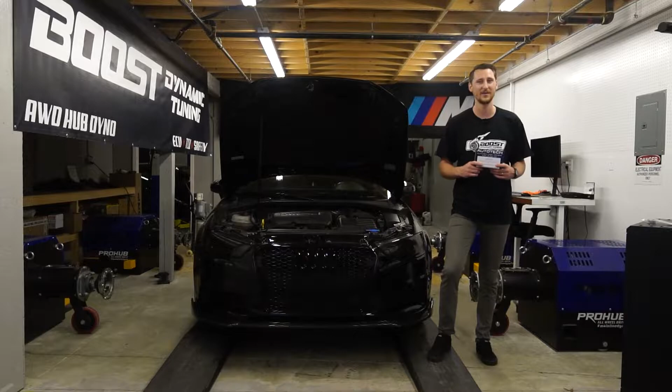As you recall, last week we installed the A3 with full E85 on the dyno and threw down some pretty massive gains, but we're having a little issue with the high pressure fuel pump keeping fuel pressure up. So today we're going to install a high pressure fuel pump so we can keep up with fuel pressure. Let's get into it.

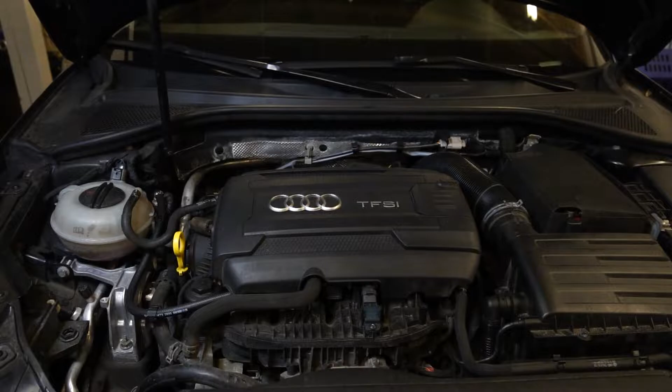As you guys already know, remove this engine cover and set that off to the side. So here's the high pressure fuel pump, this is what we'll be removing today. What I'm gonna do is go ahead and disconnect the fuel line. You guys can disconnect it from up here, but I'm gonna do it down here so I don't have to break the clamp.

We're gonna keep that there just in case some fuel decides to come out. Do not open your driver's side door unless you disconnect your battery, or the fuel pump will kick on and squirt it everywhere.

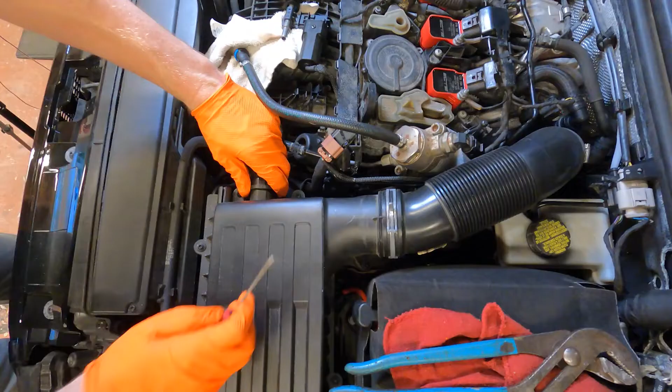Now that that's done, we're gonna go and get to this fuel line down here. We could remove the air box, it's not the world's hardest thing to do. I might just remove the air box to make it a little easier, so let's do that. Grab a little pick, right here, get that out. That's off.

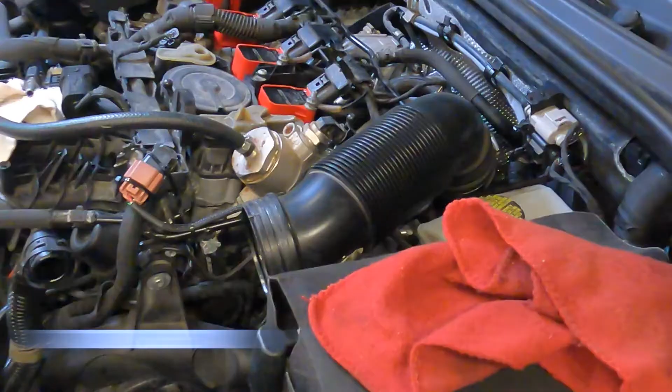So I usually start in this corner, get down below, give her a good yank. Good yank, there we go. So we got a 17mm wrench here, go ahead and turn it righty-tighty, because don't forget we're underneath, so it's the opposite way.

We got this coolant line right here, it's kind of getting in our way. Here, let me get a small wrench. Alrighty, this will help.

If you wish, put this in there. I mean, nothing should squirt out, but if it does, all right, so I'm gonna put the rag right here to catch some fuel. It's a hot engine, it could combust, but I don't really think that's the case.

Next thing you need to do is take off these bolts, take this connector off. You guys know how I like using my pick. There we go, alright, let's take those bolts out. So we're using a ZN14, what they call a triple square.

Now, next thing we're gonna do - it's pretty warm, but I'm just gonna wiggle it. There we go, kind of push this fuel line down just a smidge. Oh, it's trying to squirt out, so I'm gonna put this right here.

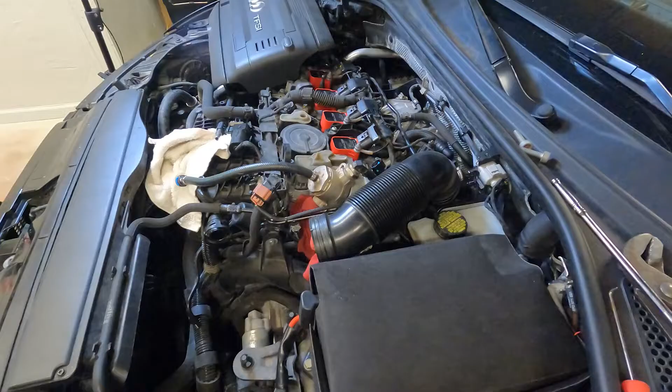Without damaging the mating surface, I'm gonna use this to kind of pry it out. Push that fuel line back. Fuel line's pretty tight up there.

I just want to relieve that fuel pressure, so I'm going to remove this boost hose. I'm not going to remove the hose, but just break this off so I can get some room. It's a little tight and the high pressure fuel pump is hot, this engine was just ran. So back that off, there we go. It's going to give us a little more room to go back there.

Then we have a T25. I'm gonna get a magnet so I don't drop that bolt. There we go, alright, now I can remove the fuel line.

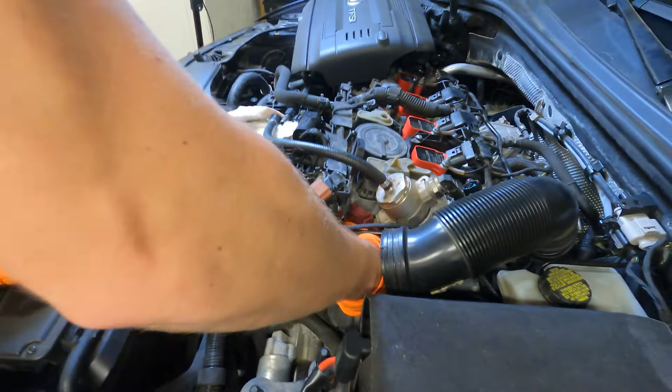Oh, it's still tight even with that moved. There we go. All right, high pressure fuel pump is out, go put it on the bench.

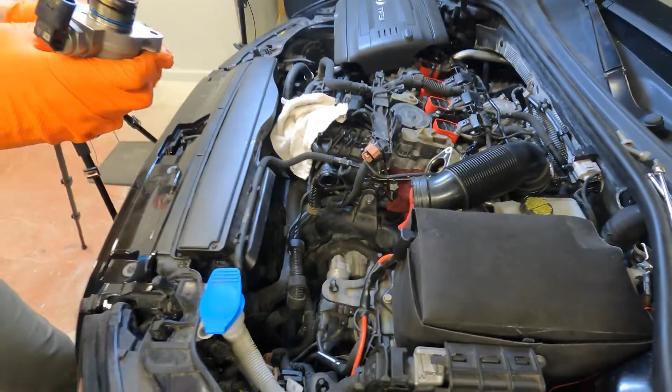So I'm gonna try using this, there's this tool to do this right, I did not get it in time. I'm trying to get this done here, so let's try this. I'm gonna press this down, nothing too crazy, until the spring's pretty much compressed.

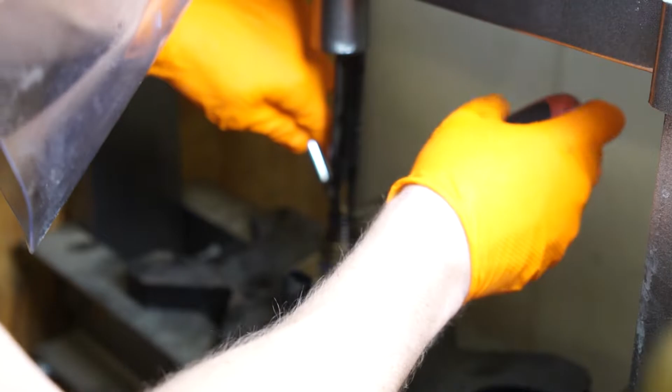Both on there pretty nice, there we go, look at that. That's a clean removal, just saying, for those of you who don't have the tool. This again, you can get this from Harbor Freight, spring compressor tool, or Sears. Honestly, I think I got it from Sears.

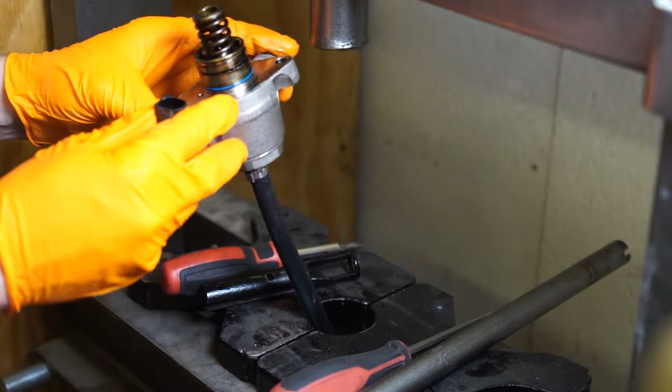So back this off. All right, let's go over to the vise. Alrighty, good to go ahead and remove this, set this off this side. Remember guys, keep a clean work area.

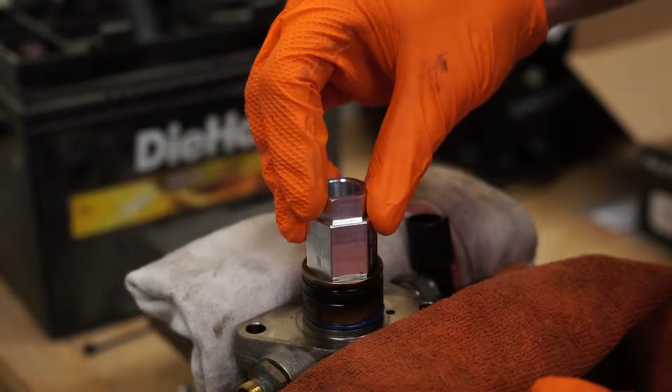All right, so apparently this thing is gonna go here. Wow, that is loose, they're not lying, watched a couple videos, they talked about that. And we got a good old 27, so let's see what we can do here. A little excessive on the breaker bar, but I wanna see what it's all about.

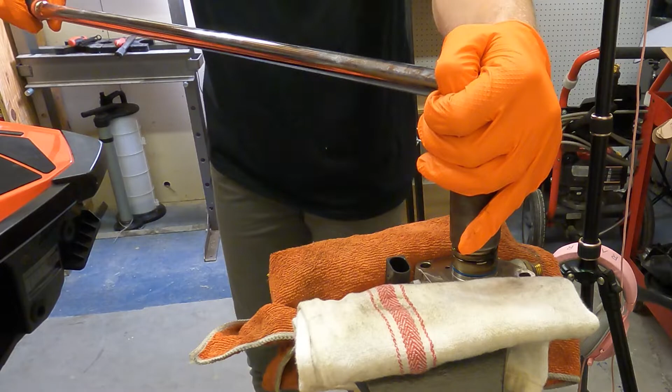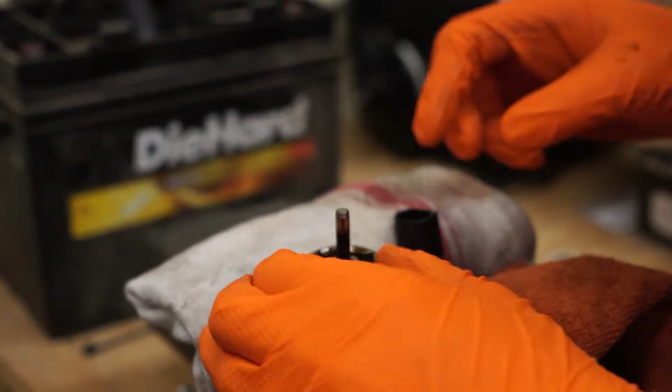So, here we go. Boom. Oh, should want just a smidge more. You guys heard it a million times, there's a seal here, we want to be gentle. When we were prying on it before, you know, we don't want to go sideways, we want to go straight up.

All right. Oh yeah, we're draining fuel on the ground right now. Push this through.

Go. All right, here's the new one, Autotech. Please do not let me down. You got this, get that in there.

Put this back in here, this is where the seal part is. We want to be really fragile - really careful, sorry. Beautiful.

I'm guessing that's where people like hit this lip and they'll cut that seal and you won't be able to retain fuel pressure.

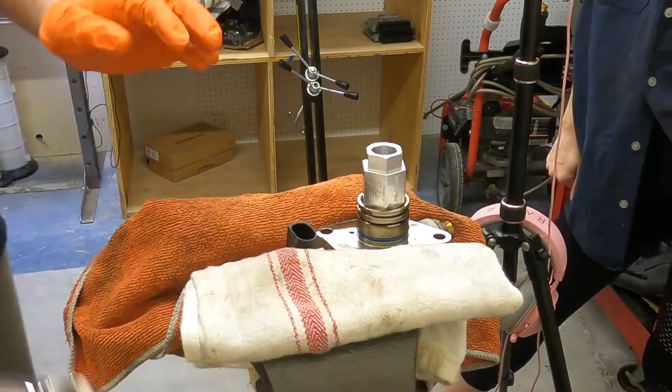All right, we're gonna call that Guten tight. You guys should be able to feel it.

All right, back over to the press. Alrighty, so I highly recommend this press for this job, because you can't get it off angle and then you're gonna tear the seal inside there.

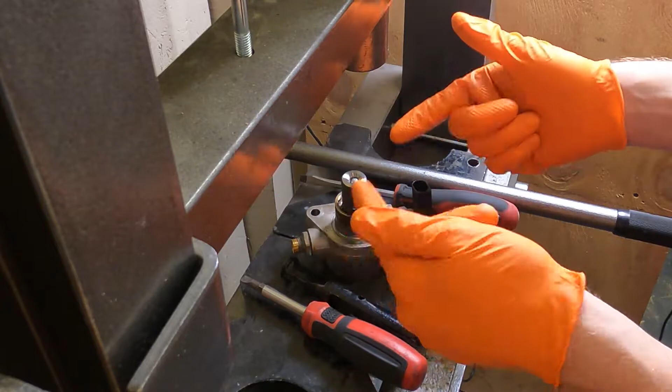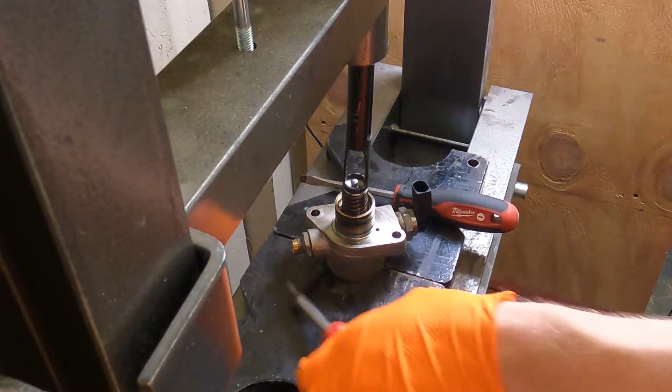So we got some keepers we need to put in, and that's why we have a keeper tool. There we go. Compress it down a little bit. We don't need these. Nothing too crazy.

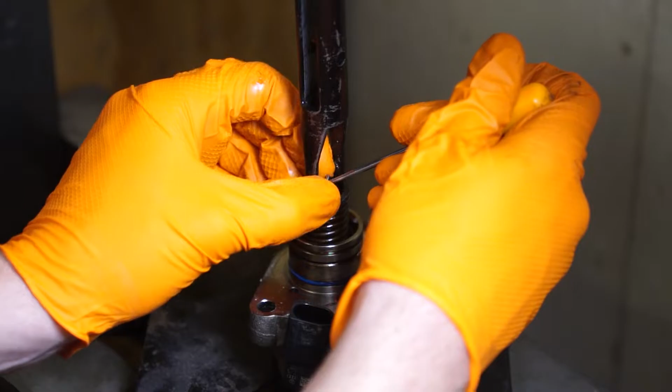Oh, it's magnetized, there we go. Cool, one side in. Oh, no, it's not. One side in.

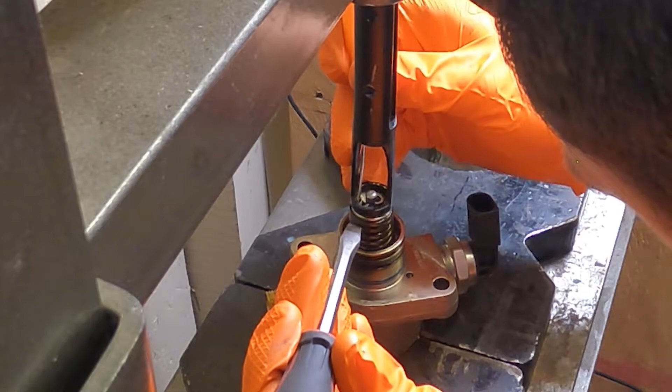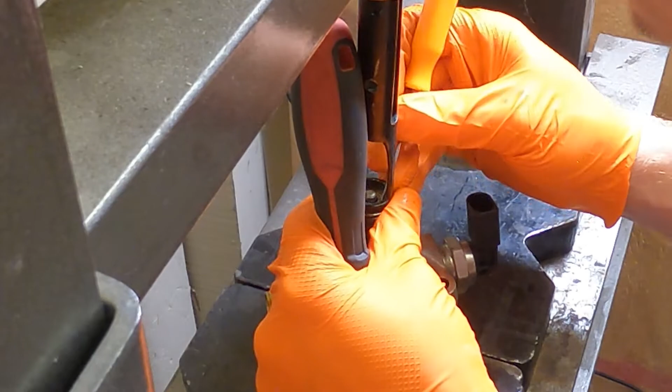The press, not going... okay, just like that, boys. All right, swinging it out.

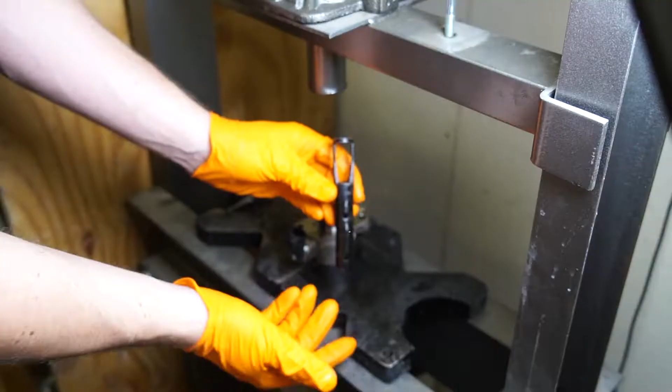Done and done. So here's the tool I use, it's a spring compressor tool, but this is part of it. I took it off right here. Makes the job a lot easier in a press because that seal can get damaged in there and game over.

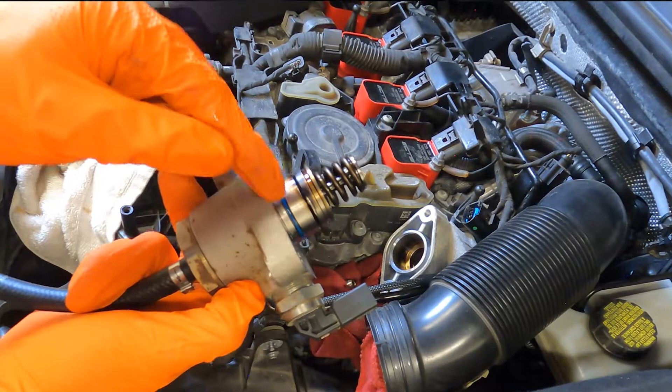All right guys, time to install the fuel pump. Don't let this seal be dry, honestly it needs a little lubrication to slide in here. You don't want to cut the seal. I'm gonna install it sideways a little bit here and see if I can line it up with this, just like I did.

There we go, let it fall into place there. All right, we're gonna use the screws to kind of pull it in, going in a back and forth direction. So we have M8 bolts, the torque spec is gonna be 20 Newton meters. I put some Loctite on it because why not, blue Loctite, not red.

All right, so what I'm gonna do is go in a back and forth tightening sequence. Couple of cranks here, get your bit back. Stop there, feel resistance. Stop there, feel resistance. Feel resistance. There we go, that's tight. The torque spec is 20 Newton meters.

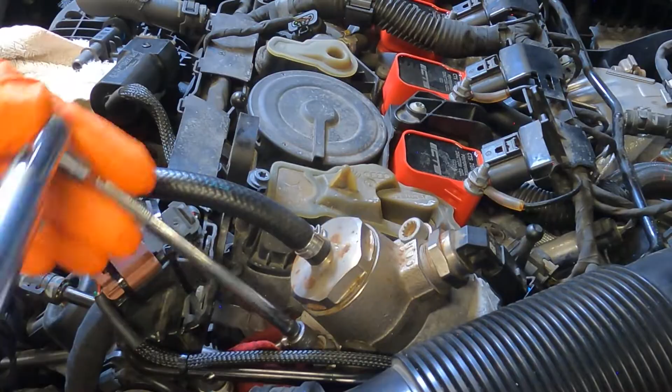You kind of want it to go on easy. If not, that means the line needs to be bent in the right orientation. See, mine's not going easy, I gotta... there you go, see how easy that is?

All right, grab your 17mm wrench, let's torque this down. Don't forget, we're not going righty-tighty, we're going lefty-loosey because it's upside down. Don't break this plastic hose right here, even though you want to, because it just sounds like fun stuff.

All right, nothing too crazy, but it needs to be tight. It's your fuel line, so that seems about right. All right, let's get these brackets back installed.

You don't have to remove this bracket here, guys. Just so you know, I did this just to give me a little easier access. Most of you want a quicker job and all that, but it's to each their own. If you want to make some room for yourself, go ahead, make it easier.

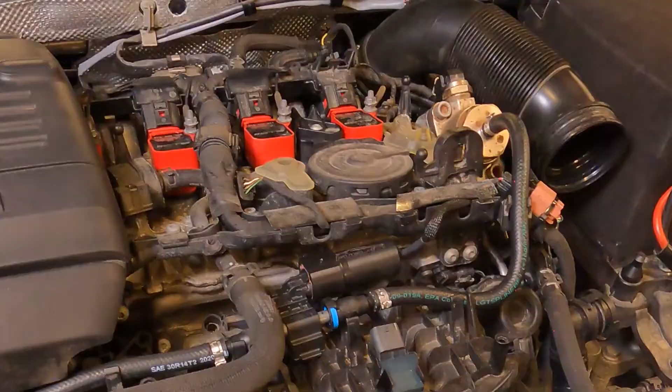All right, let's put this back in. Plug this connector back in before I forget about it. The little cheat to this, guys, is this hose, it's gonna get in your way. So just, nope, it's gonna go behind this line here. Watch this.

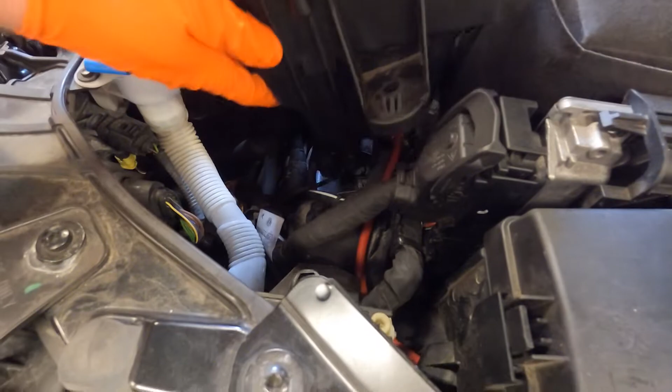Actually, sorry, in front of the line. Right there, see how I pushed that over there? Go over here. Just like that, see? Nice, easy. Go.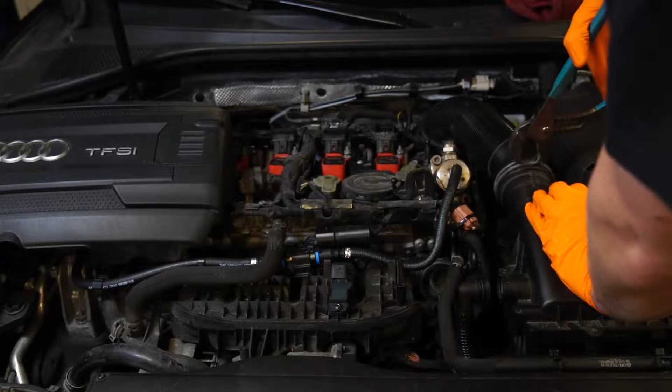Alrighty, to go over everything, just make sure this nut's tight. You have the connector connected, fuel line's on the guided path. Everything's nice and tight. If you unplug that, plug that back in, because that'll cause issues. And let's put your engine cover back on. Actually, don't put that on just yet.

We're gonna start this thing up and we need to inspect to make sure we have no fuel leaks. All right, so guys, note, we need to get fuel pressure up here before we start it up, just so we don't have air in the lines and, you know, et cetera, et cetera.

So what you're gonna do is you're gonna open the door, it's gonna kick on. If it doesn't, cycle the key. And then, here, listen to it, ready? All right, fuel pressure did not, oh, actually I heard the fuel pump. Okay, kicked on, key on, engine off. There we go, I heard it. Shut the door.

One more time, open the door. Key on, engine off. There we go. We should have enough fuel pressure by this time. Let's go ahead and crank this thing on.

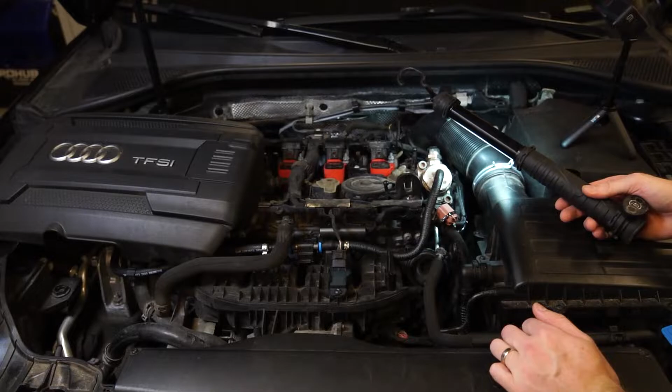As you saw, took an excessive amount of cranking, there was still air in the line. Inspect to make sure we have no fuel leaks. Sounding good. All right, let's shut it down.

Well, there you have it, guys. Not too hard of a job if you have the right tools. I would highly recommend having a hydraulic press with that little specialty tool, it's the valve keeper tool.

As you see, a lot of people are trying to use one little flathead on it and they're pushing the rod to the left or right, and you got a seal down here. So if you push it to the left or right, you could snip the seal and damage the whole part. Then you're gonna have fuel in your oil, and that's not a good thing, unless you're trying to clean your engine. Now, other key notes, lubricate the rod when you're putting it in so it smoothly goes in and doesn't clip the O-ring again.

Probably cycling the key an excessive amount of times. It took a little bit of excessive cranking, which isn't the worst, but it's always good to have lubrication and fuel on the high pressure fuel pump when you're cranking the car up.

So to go over the issue with you guys, I was having an issue when I was in 4th gear and I would just punch it out of nowhere. The fuel pressure had a hard time raising the pressure and then keeping up, but once I shifted gears it was fine. You could feel a little bit of misfire, stutter, fuel cut, so it's not good.

Here we go, it's in 6, same thing. Actually I'm not gonna go in sport, I'm gonna go in drive here, and I'm gonna press OK.

That's all we need right there. That's usually when we had the issue, get EPC, the whole works. Right now we're stage 1, full E85, and this is when you're gonna have this issue, going straight full E85. But an upgraded high pressure fuel pump should solve it.

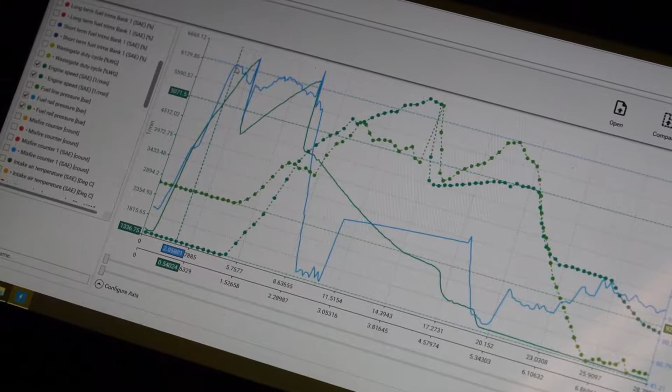We just took a log, so we're gonna show you guys what that log has to show. I really wanna show you the actual data of what changed when we changed the part. This over here is the old high pressure fuel pump, stock high pressure fuel pump. This is the new high pressure fuel pump.

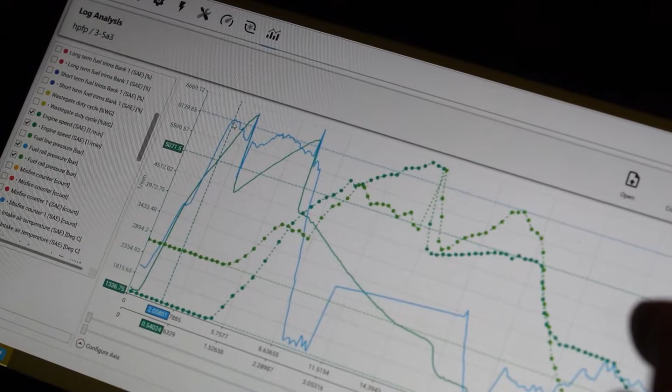See over here, we have 6,129 RPMs. This is when I was in that gear, you guys watching the video. I dropped the gear and then boom, I'm coming up. Here's my high pressure fuel pressure, 218. It's probably PSI, 218. I want to be above 200 PSI during this whole run, which we are.

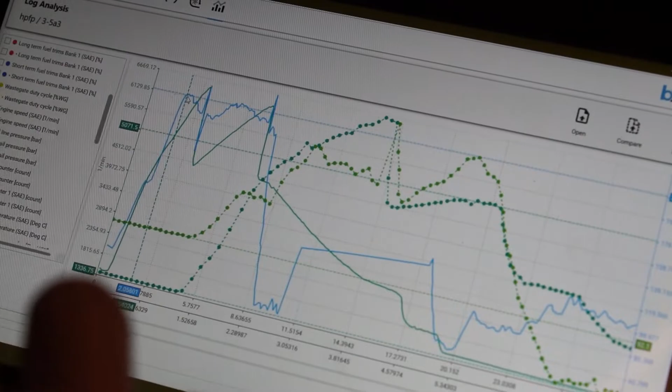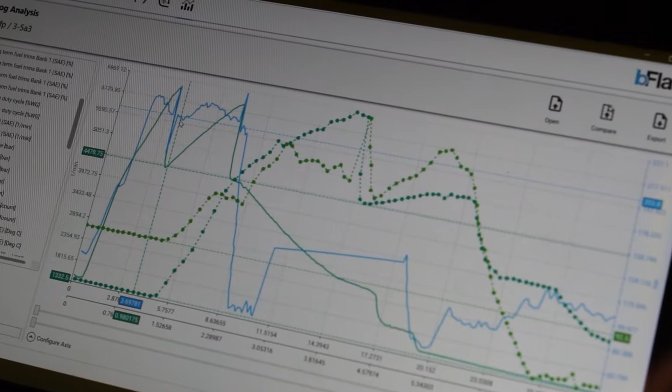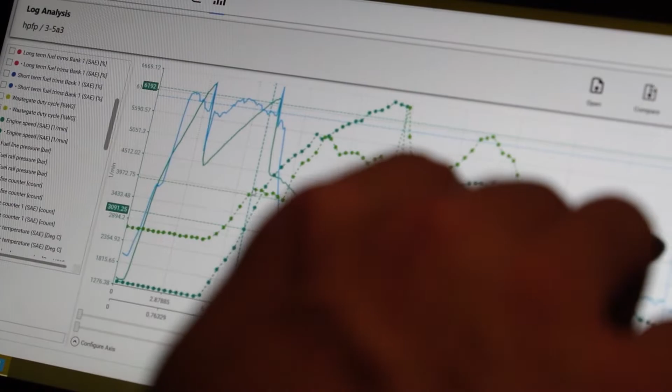See right here, the lowest point, which is right when we get back into the next gear, I'm at 203. So I'm gonna go show you the previous. This is when I dropped gears, boom, at 3,091 RPMs, and you see fuel pressure at 137, guys. That is disgustingly low. The car is freaking out.

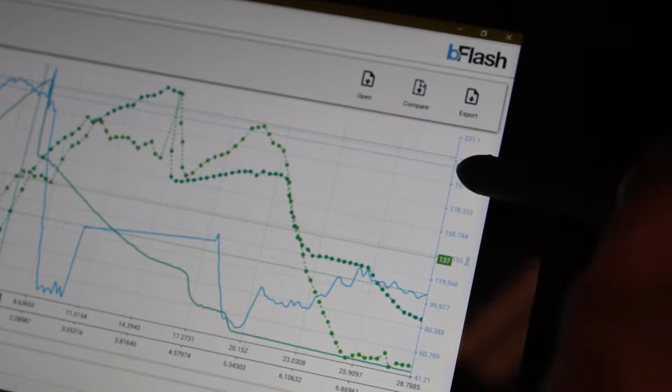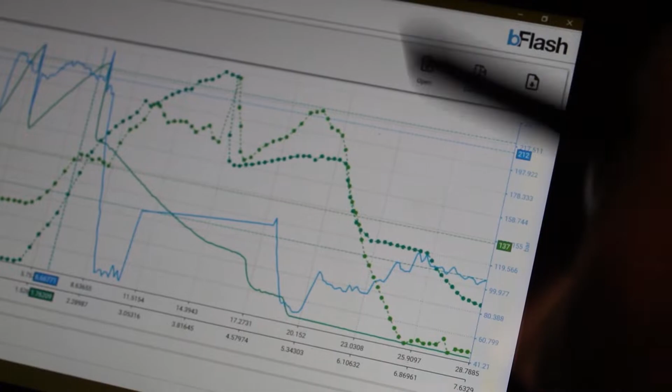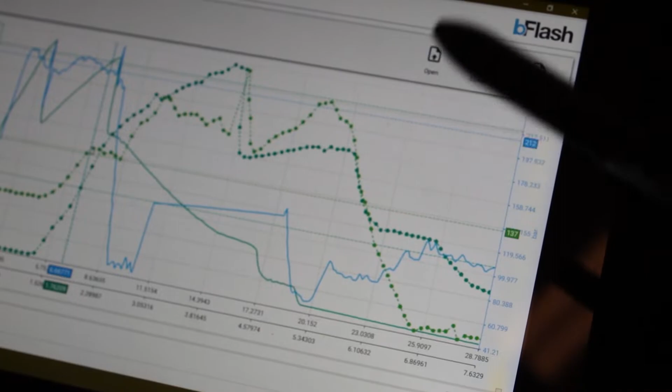So why do we need high pressure so high? Well, we have E85 and it requests more fuel. What does that mean? It means we can't change injectors on it because this is a direct injection car. So we up the fuel pressure to inject more cc's of fuel for that millisecond that the injector's open. So we only had 130 PSI, that means I couldn't get enough cc's of fuel into the cylinder. I mean, look at this.

Let's scroll through this so you can watch the data. Look at this number while I scroll through. This is the car struggling through the RPMs. Struggling. I'm almost there at 6,000 RPMs, almost at 200, and then it just starts falling off again. We're not even fully done through the run. That's disgusting. Then we shift into the next gear.

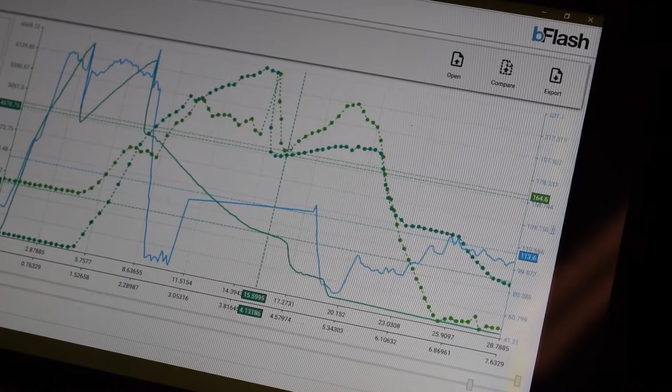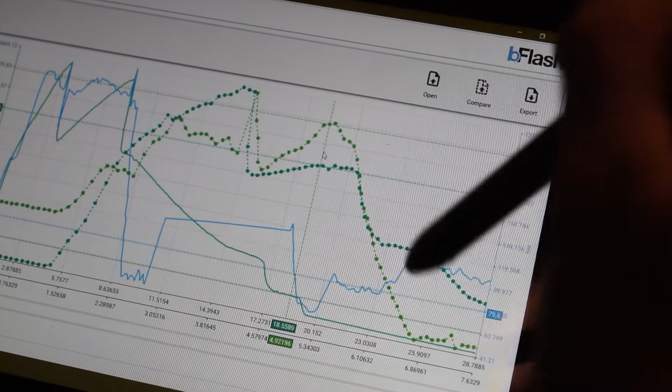146, guys, or 164 right here. Yuck, not happy. Going through the RPMs again, we finally gain, my pressure is above 200, where you want to be. Finally on the next gear, and that's just disgusting.

So let me show you the car actually misfiring during that run. I'm going to open up this one. Let's just show you the run, here's the run without the comparing action.

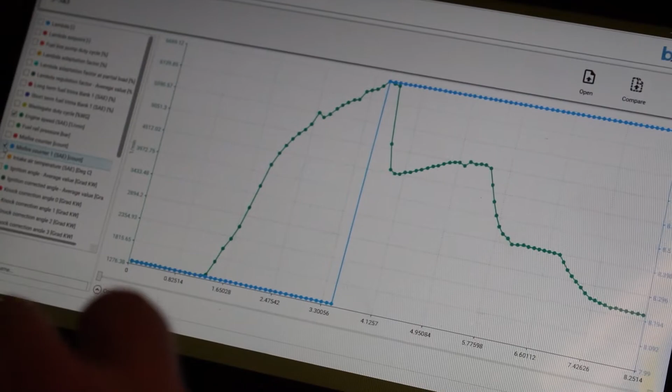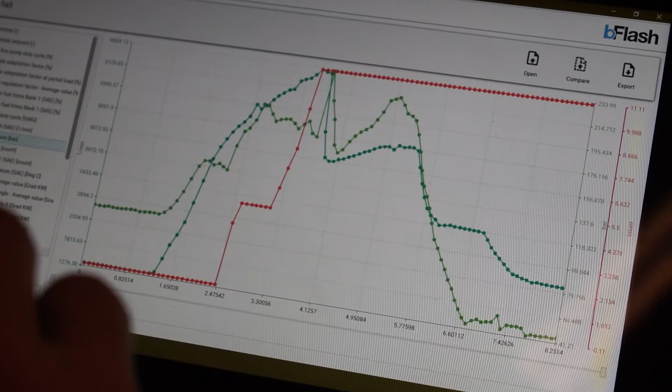Here's my misfire counter, that's just the total. Let's get the high pressure fuel pump on here, fuel rail pressure. This is misfire, guys, just to let you know. See, misfire count was at 0. During my run, boom, I hit, what is this at? I had 4 misfires through all the cylinders, which is disgusting. You do not want to misfire at high horsepower, you can hurt your engine, but this is not too much power, so the engine's going to take this and accept it.

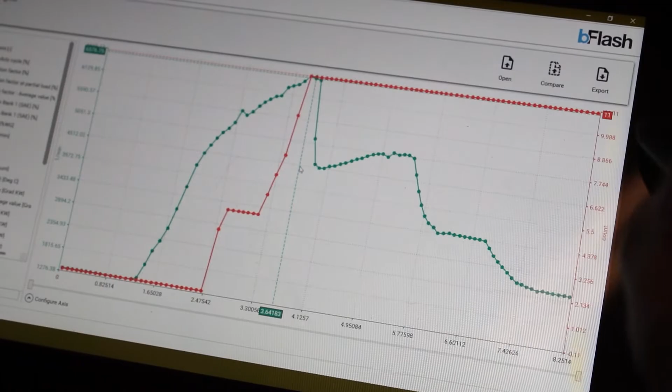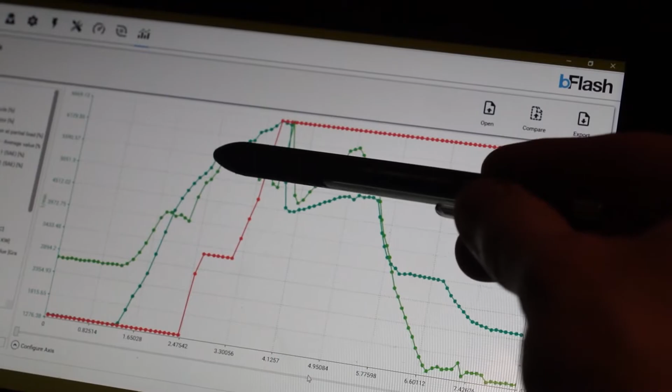Now we're getting to the top here, guys, we got 11 misfires. That is disgusting. Now let's show you fuel pressure so you can see where it started misfiring. Fuel pressure is stupid low, but it's okay because we're not moving too much air. Now we're getting into the RPMs here, look at this coming in. This is where we got our first misfire at 5,600 RPM. Coming over here, right at 6,600, we just get misfires. This is just all due to fuel pressure.

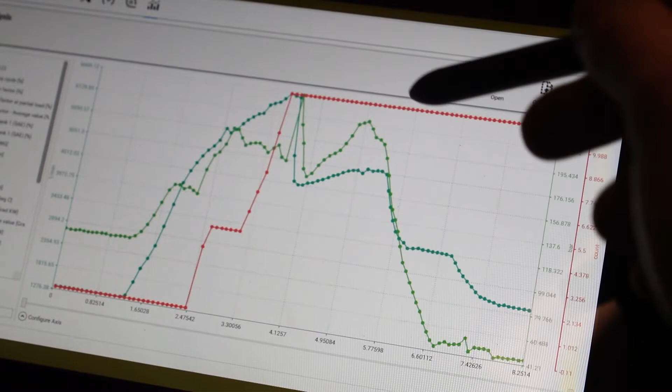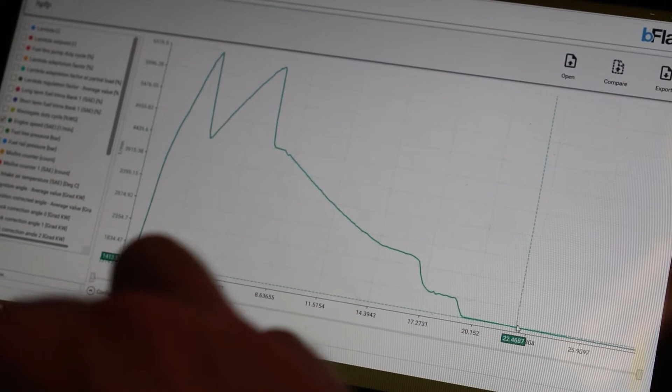So now you guys can see, let me show you the other one, how many misfires we had on it. Let's spread this run out so you guys can see it. Fuel pressure doing good. Misfire count, look at that, 0 misfires. Fuel pressure is above 200 the whole time.

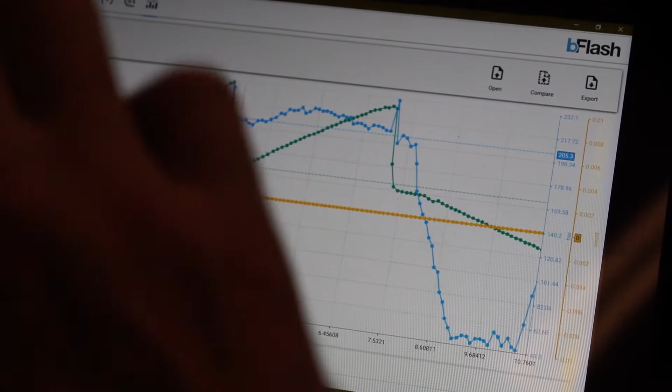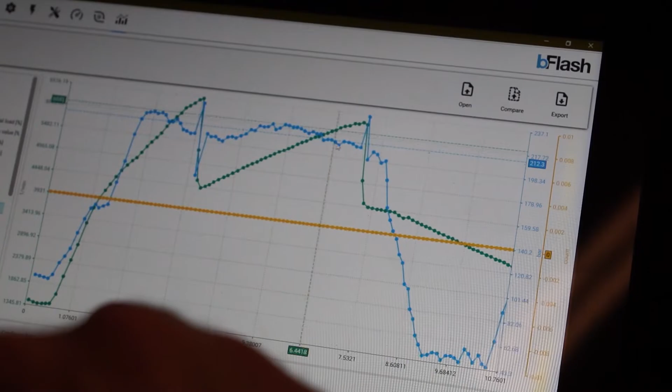This is during the gear shift, so I don't care about fuel pressure during the gear shift. So right when we get back into it, see, this is where we pick up. I'm already starting at 205 bar into my next pull, and the thing is doing phenomenally. It's not even stressing, so we're not overworking the high pressure fuel pump. The engine's healthy because we're injecting the right cc's of fuel. This is a happy engine, guys. This is why you need to upgrade your high pressure fuel pump.

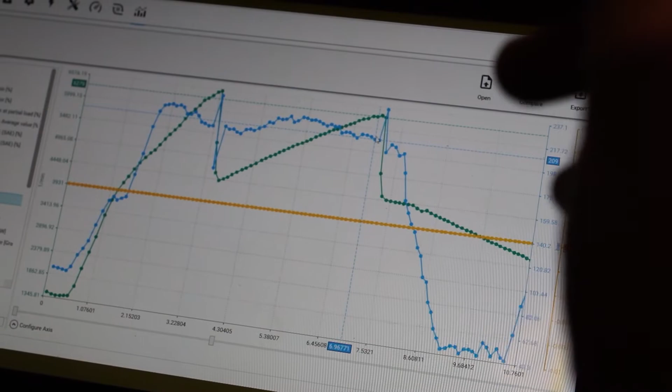There you have it, that's the data side of it. That's the end of the install.